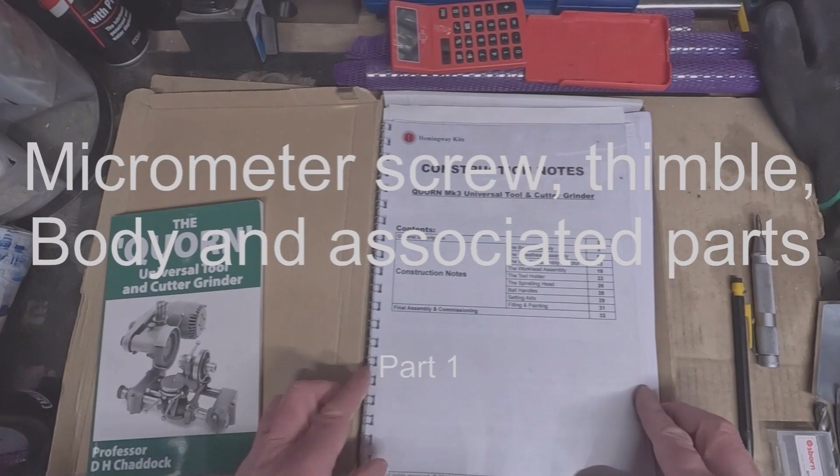But anyway, you can hear a ticking noise in the background. It's my garage heater because the temperature at the moment is 5.5 degrees apparently. Right, now

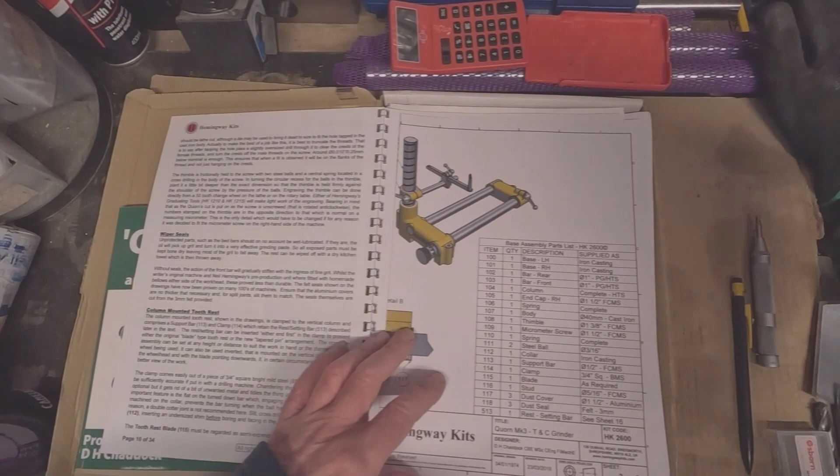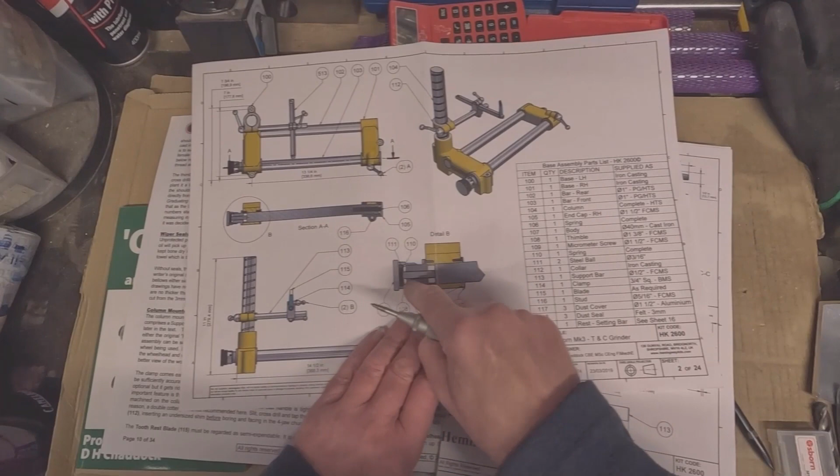To get on with this, I'm kind of going back because I started doing these cotter pins, but I haven't done all these little ancillary bits that fasten onto here. So that's what I'm going to do and make this micrometer screw plus attachments. We have a dust seal there and an end plate at the end there, which is also shown here. That holds the tension spring in.

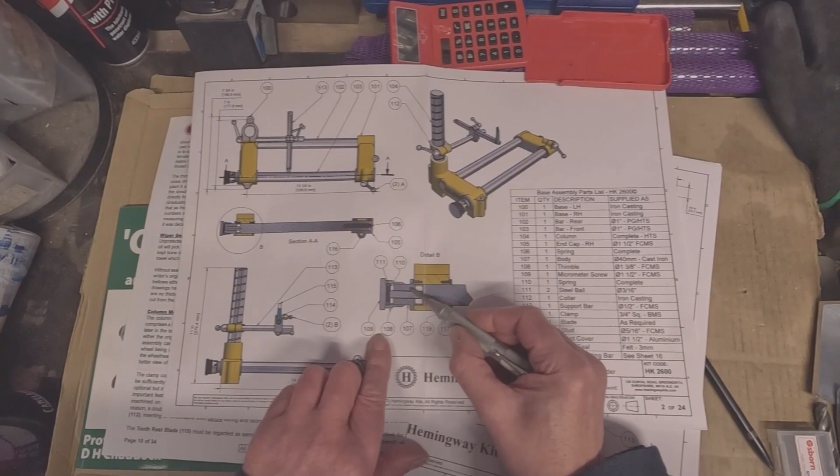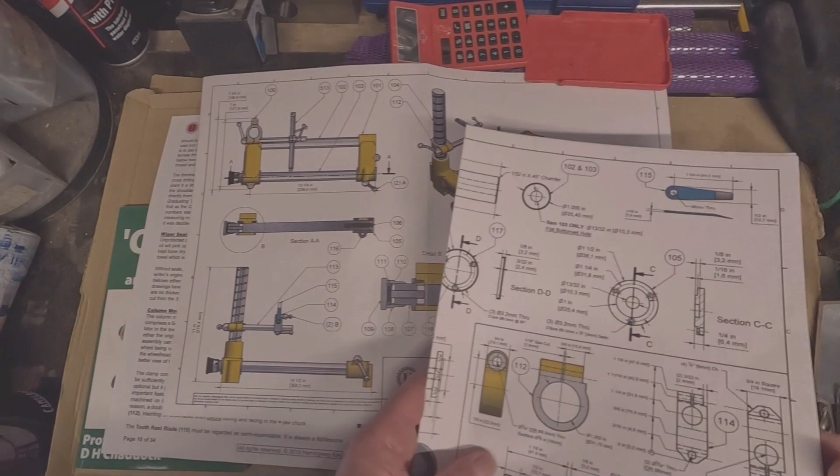And we have a micrometer screw, which is this bit with a threaded piece there. We then have a cap that fastens to this body here that protrudes, and this sleeve, which has the divisions on it, is attached and held onto this screw with two ball bearings and a spring, so you can reset the divisions that are on it. As they say, it's not a true micrometer screw, it's this piece here.

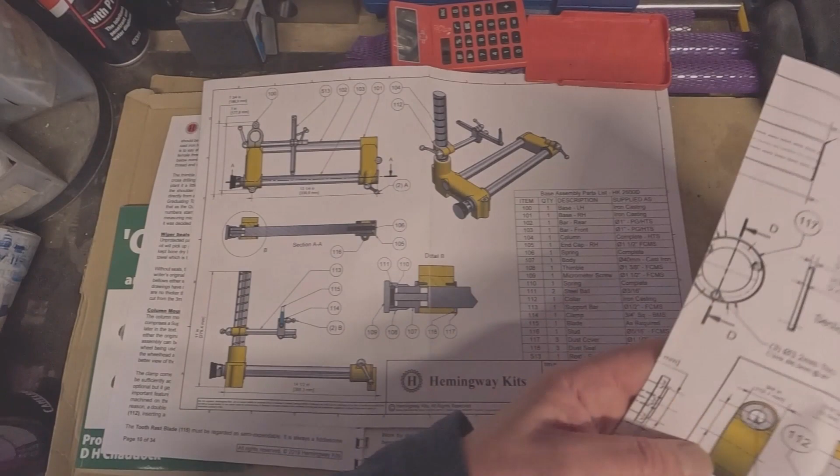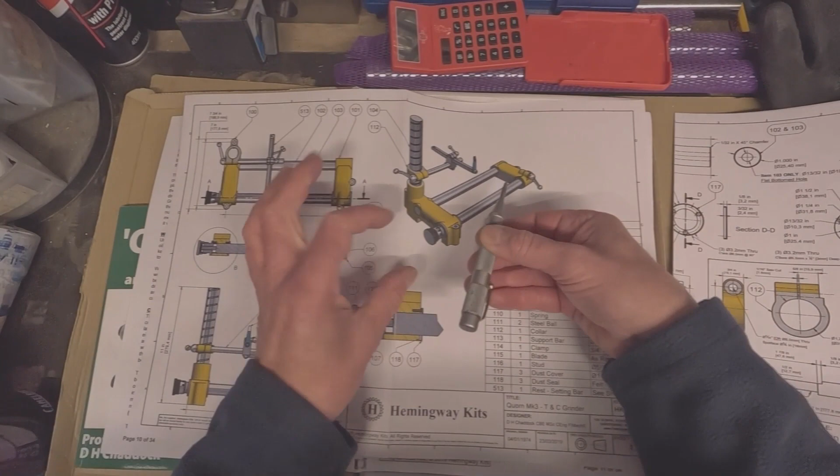What it's basically for, I think, is when you set your tool up against the wheel, you can then zero it, and if you're doing multi-facet end mills or whatever it is, you can come back to a zero. You can reset that round to a zero, so then you can wind it off or wind it on. I think it's wind it off. Well, it's wind it that way, so that will go away from the wheel. And then obviously you can move the cutter around, bring it back to zero.

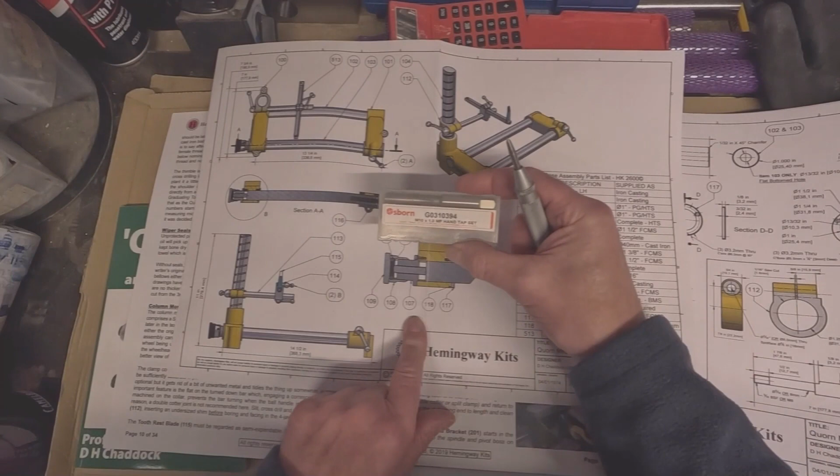So obviously this needs to adjust, but it's more important just keeping it to a zero, I'm assuming. So we've got some bits to make. So first thing, I am going to turn this body, 107. It's a body made out of cast iron. I'm going to go for a fine M10 thread because I have a fine M10 tap set, and that's what I'm going to use because I haven't got any 3/8 BSFs. I've been having a look and I'm a bit short on the ground for English stuff.

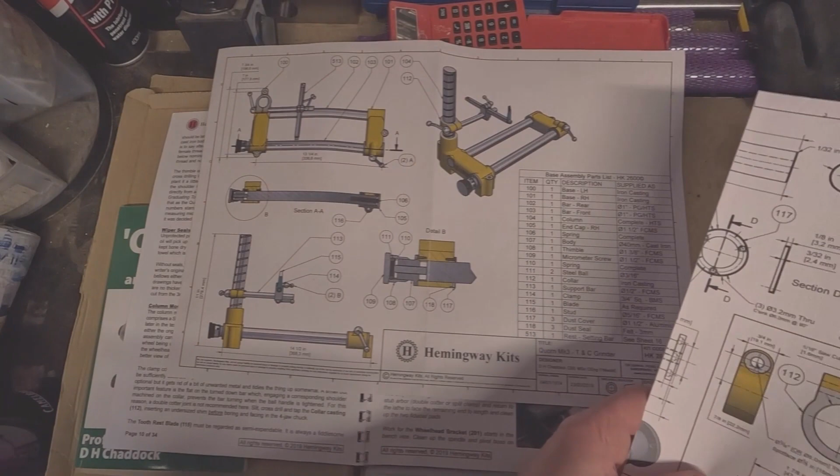So this bit first, and then I'm going to make this end cap, which is a basic end cap. I'm not going to do any of the holes as yet. I'm going to do all the turning work. That end cap there, and then I'm going to do these aluminium ones, and then I'm going to come back. So see you in a bit.

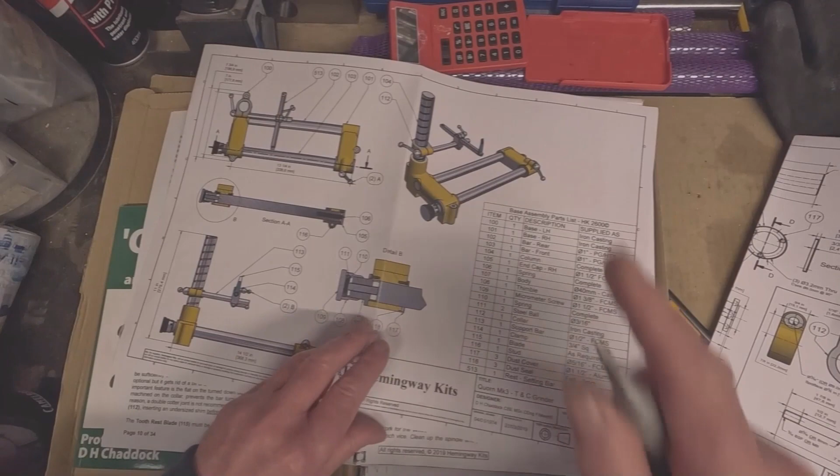Right, I'm over here at the lathe. I've got a new bracket on this camera holding it up. Hopefully I'm a little bit nearer. Now there's not much in the way of telling you which way around you want to do it, and whether this cast iron is for anything else without digging through the instructions, but I've got it held in my hard jaws. Got enough room here. I'm going to flick the face up first and drill it and tap it for the thread. I want to do the face. I'll take a light skim on the OD first off, and then once I've drilled it I will check the OD to see whether the drill's knocked it out at all, which I hope it doesn't. It made the nut alright that I did.

I am going to go most of the way through here. I'm not going to drill it fully in case this cast iron is used for something else, because at the moment it seems quite a bit long. But I'm going to turn the OD, just a rough OD. I'm not going to finish it off, and I'm going to turn this diameter here and not finish that off either. I'm going to wait.

My garage at the moment is about 8 degrees, and you might have heard a bit of a ticking before, and that's a heater trying to warm it up. I would like to make everything at least 10 degrees upwards, so I'm around a mean temperature for when I do other pieces. Obviously in the summer it gets warmer. If you live in a different part of the world that's warmer, you may not recognise a little bit of expansion and contraction as much as what we might do here. But fingers crossed. We're up to 9 degrees anyway, so things are working.

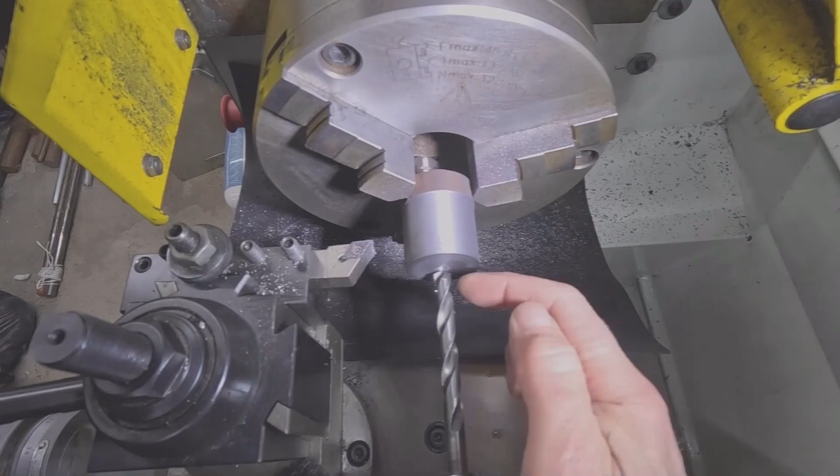I fast forwarded on this section because all I'm doing is skimming the face, slight skim on the OD, centre drill, and then putting the drill down ready for tapping. I just mentioned here I'm drilling 1 1/8 inch, which is just over the full length of the job, so I can part it off into clear space.

Now this is cast iron, and obviously it's a very fine thread, so this is going in quite easy by hand. Oops, knocked my camera stand. And obviously, because it's a blind hole, I'm just doing this by hand.

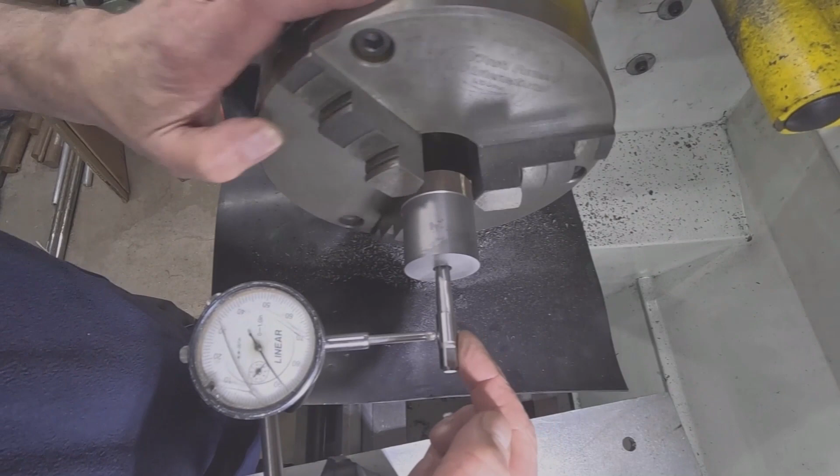I've finished off now with a plug tap. I might have to run it through once again, but I've left it in there and put a clock and an indicator on just to see what this is running out. And I have 1, 2.5 thou. That's the tap running out now.

I think 2.5 thou is good enough really for a tapped hole. But at least it's not mad running out all over the place, so I'm quite happy with that. And we'll see what we like when we do the other thread. Now I'm going to finish this off.

Now I'm up to a nice balmy 12 degrees, which is, to me, it's not room temperature, but it's nice enough. Everything feels slightly warmed up in here now.

I'll finish the OD off, the length and the OD, and then this is going to be parted off, and there is a little flange on the other side to finish off. Just another fast forward section where I turn down to the diameters, leaving about 20 thou or so, I can't remember, left on for finishing.

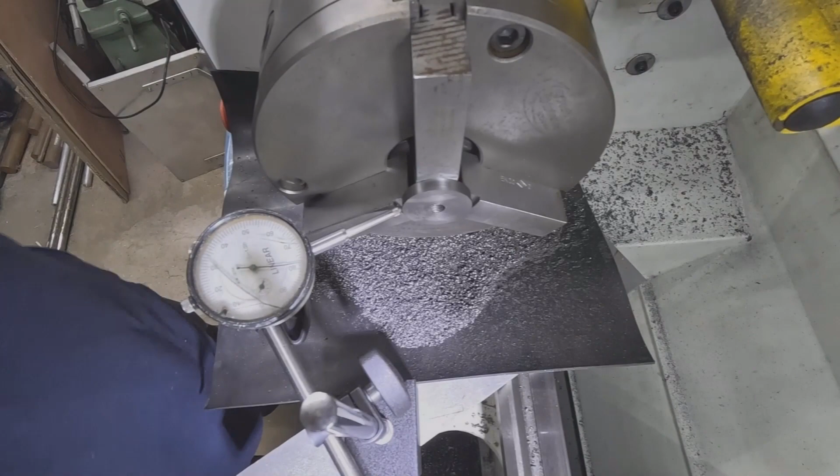Now I've swapped my hard jaws out for these soft jaws. I am a believer in soft jaws. I've worked in a jobbing shop a long time ago, and we used 3 jaws. I believe if you've got a decent 3 jaw and you're lucky enough to be able to get hold of some soft jaws, you can use them quite good. A lot of people do, or the ones that bolt on. Kitagawa make them, and other people.

So I put this in. Yes, I have revolved it round a couple of times, and I don't know if you see the clock, but we are getting half a thou. So as far as I'm concerned, that's good enough. I'm going to measure across this flange to get a thickness, then I'm going to take it down for the boss.

Right, people want to know if I dropped any bollocks. Yeah. Eagle-eyed among you, if you saw anything, I misread my mic. What a prat. Luckily, I've misread it, as you do sometimes, up, not down. So there's me going back to Imperial and saying I'll keep up to speed with this. I'm 25 thou up. It's not good, is it?

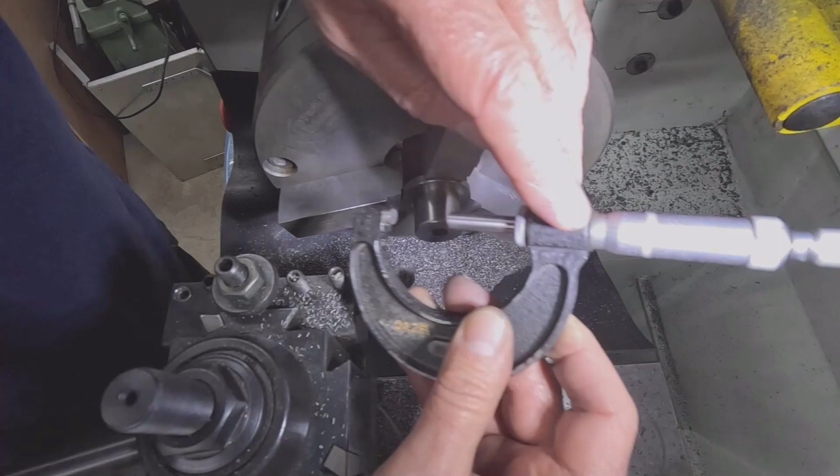Obviously this is where I fast forward, because I've got to try and catch up by my mistakes. Taking 25 thou off the front side and then turning it round, clocking it all back up and doing the back.

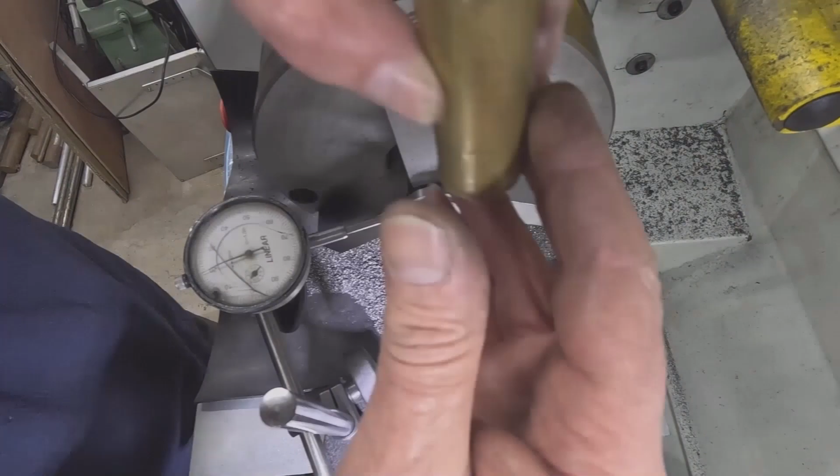Now, I'm not saying for anyone to polish like I polish, because obviously you don't want to get your hands inside here, but well, we all know what we do that we're not supposed to do on machines. Anyway, that's finished.

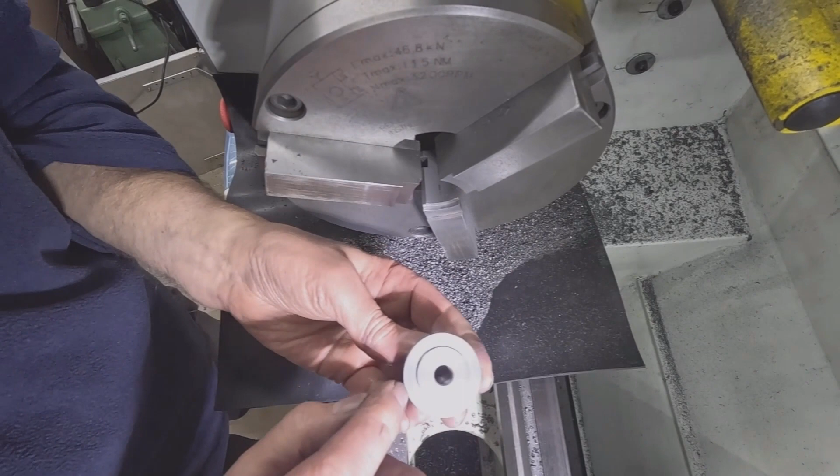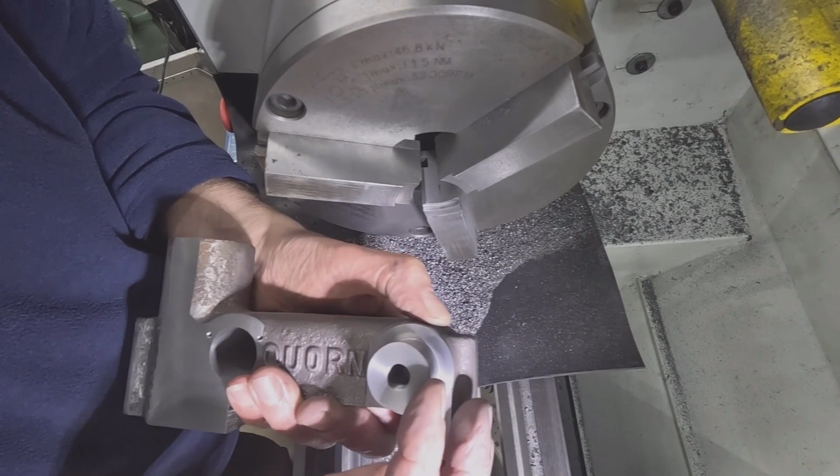Now you'll notice I will have to machine a little bit. Ooh, I thought I did, but no, it fits in. There we go. That's nice. Yes, it sticks out a bit. It's the casting. So like I say, the radius on my casting is a little bit short. Don't know why, it's just the way it is. But I think we'll blend that at a later date so it all looks nice and neat.

But anyway, that's the turning work on that done. I shall rerun the tap down there to make sure that's clear, and that's one bit at least finished.